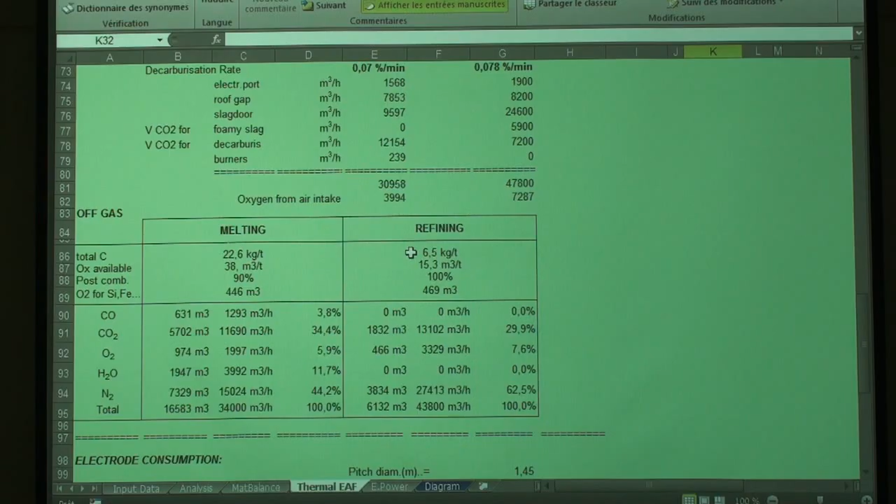You have this amount of carbon to remove and to burn, to oxidize. Yes. And you have 15 cubic meters of oxygen per ton. So you see that you can burn everything. In this case, the energy from post-combustion... So in fact here you have enough oxygen. Yes. This is the total oxygen, yeah?

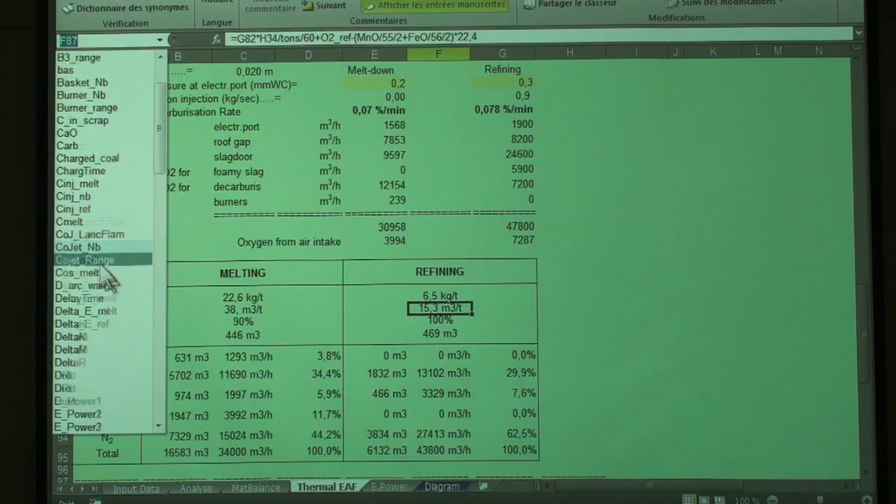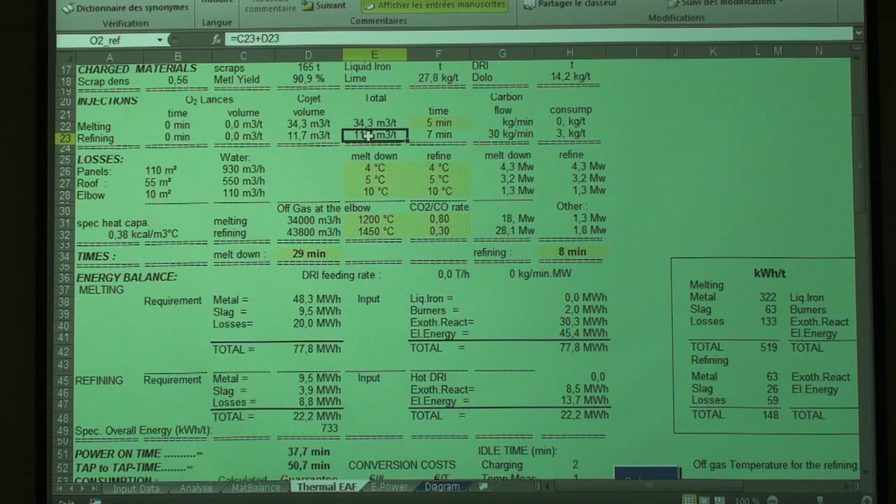G82. This one here. Alright. Yes, the oxygen from air. From the air. Plus the oxygen from refining. Yes. This one here. From the total oxygen injection: lances plus cojet.

Air plus cojet minus what is necessary for manganese and iron oxidizing, what is mentioned here. So this is the oxygen available for carbon oxidation. And you see that clearly you have enough oxygen available. For post-combustion you have even more, because of the remaining 7.6%.

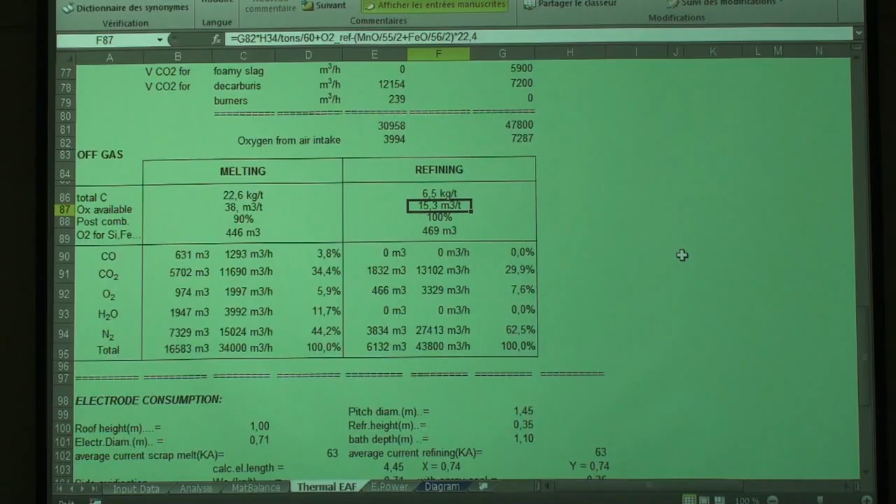That's why you can burn all the CO, which doesn't mean that the CO will be burned into CO2 in the bath. So, in the bath, for the thermal balance, we just consider 0.3. The rest of the post-combustion is done above the bath. Right? That's why the energy from post-combustion was taken into consideration, right?

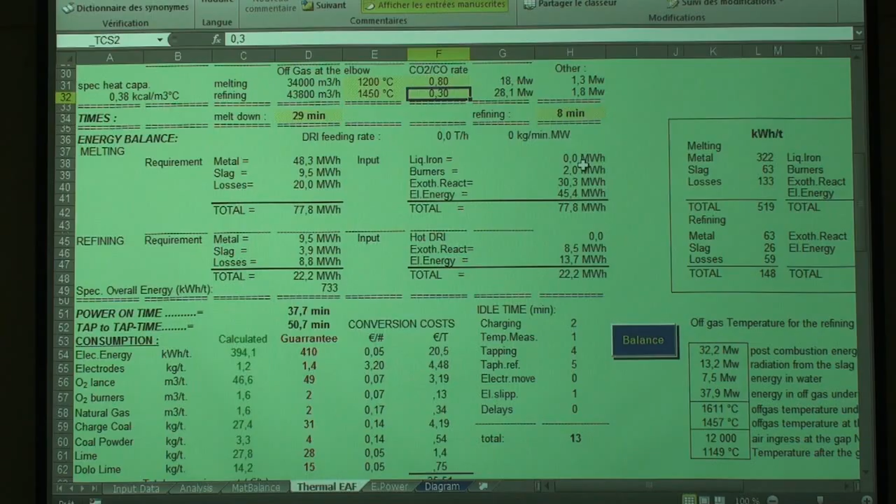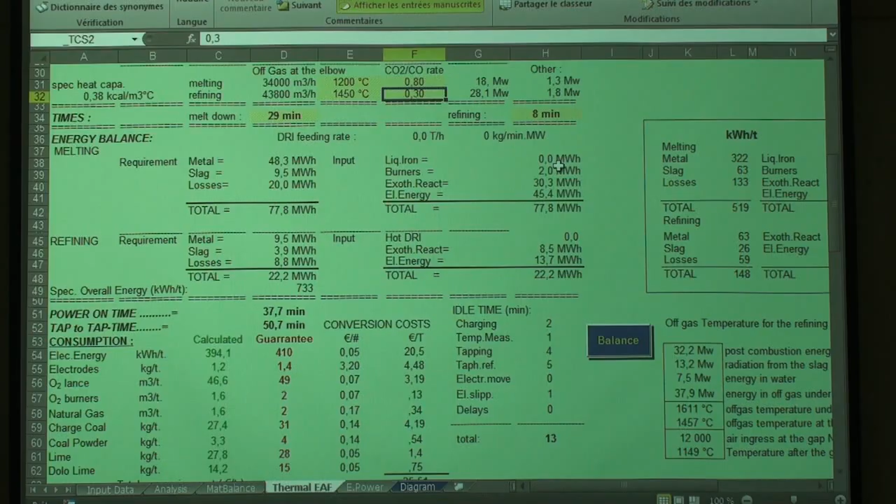And I have one more question regarding the silicon. How much silicon is there in scrap? I want to see that one once again. Silicon from the scrap. Here. 3.2 kilograms per ton. That also makes some energy, right? Okay. That's nice to hear. If you want to see the energetic equivalent, it's here. Yes.

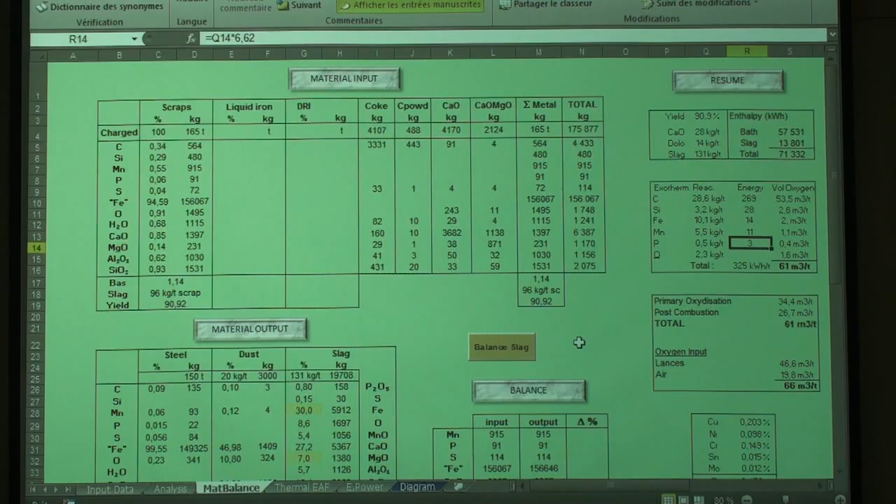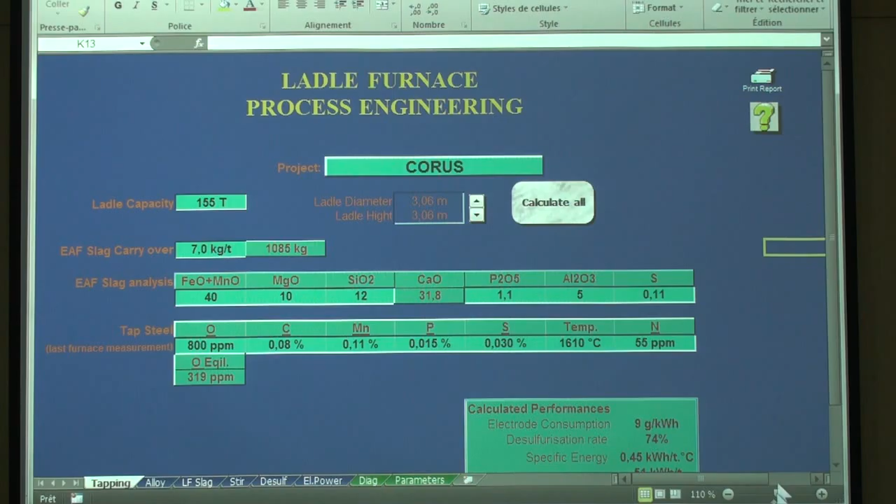Let's go into the ladle furnace. All right. So again, you see you have different tables. First, we start with the tapping conditions. And you see, if you put here the tap weight, 155 tons, the ladle dimension is adjusted.

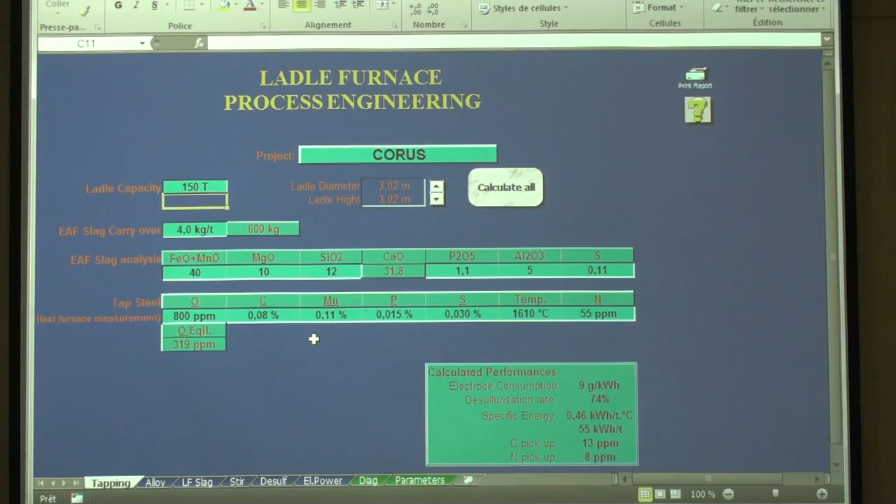The EAF carryover slag means the pour-out from the EAF, or do you charge another carryover slag? What's the exact meaning? This is the carryover slag from the furnace tapped into the ladle. Okay. From inside of the EAF. Yes. This is not the slag you get on top of the ladle after tapping, because you put lime in the ladle already during tapping. But this is calculated later. And this is the steel analysis. Okay.

Then we calculate the alloys, where you can put here the aim composition with the minimum and maximum. And you can calculate according to aim or according to minimum. So we can change the aim value and minimum value of the additives. This you can change. Yes.

If I remove this, you see you have a small advice that you have to calculate the alloys. Now, alloys are adjusted. If you calculate to minimum, you have another calculation. And you can put the cost here of the alloys and you get the overall cost. And this is what is optimized. Yes, the cost is optimized. So if you don't have cost, you cannot run this calculation.

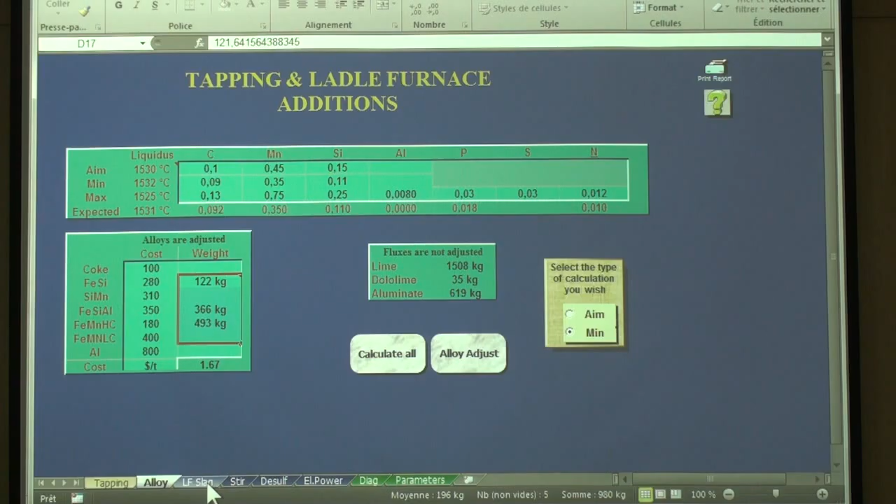And here you have the fluxes, and it tells you that the flux are not adjusted. What does that mean, flux are not adjusted? What is flux according to you? Lime, dolomite. Okay. And what means are not adjusted? It means you need to adjust it, these values are not correct. Like here, the alloys are adjusted. I see. So to adjust the flux, we have to go in this sheet.

So you combine slag analysis and deoxidization, because of course the deoxidization products will go to the ladle slag. So this is what oxygen we had in the steel. We have the ppm of oxygen from the steel, which are 120 kg of oxygen. And this is the oxygen fixed on FeO and MnO from the carryover. This is the total oxygen we have to remove in terms of kilograms. Then you have the deoxidization calculation with aluminum killed or with silicon killed. Silicon killed allows a certain amount of aluminum.

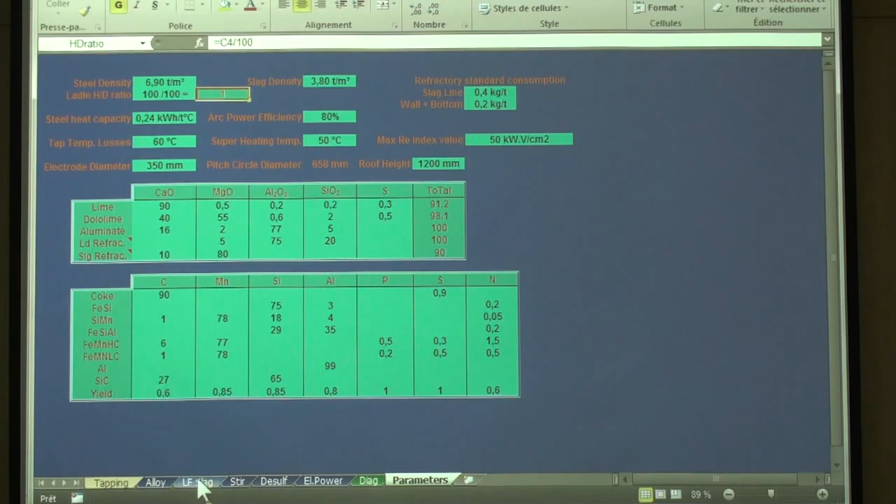So then I have the proposed composition for aluminum killed steel and silicon killed steel. This is standard analysis. You see that each time I have some Al2O3, even for silicon killed steel, because I don't consider the use of fluorspar. I know that in China fluorspar is allowed. They put a lot of fluorspar in the slag, and they don't have alumina at all. But in some other countries, like Germany, fluorspar is forbidden. France is close to be forbidden as well. So people are trying to use alternative solutions. So alumina is a good solution.

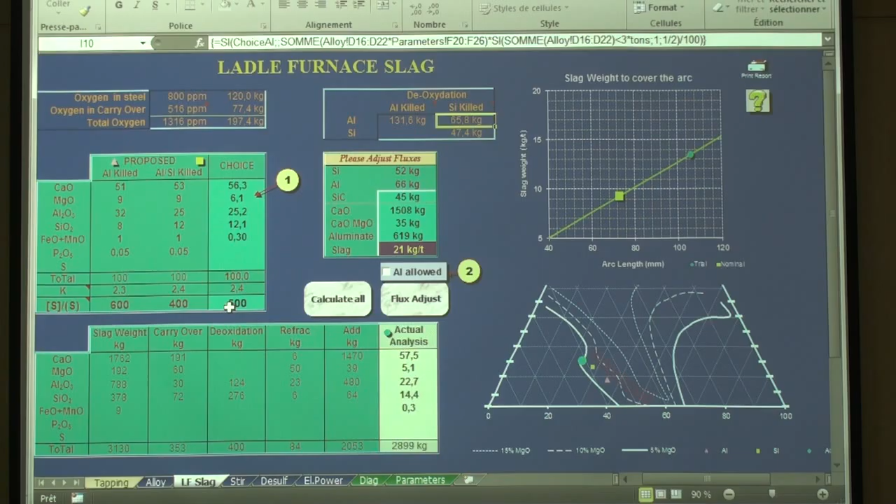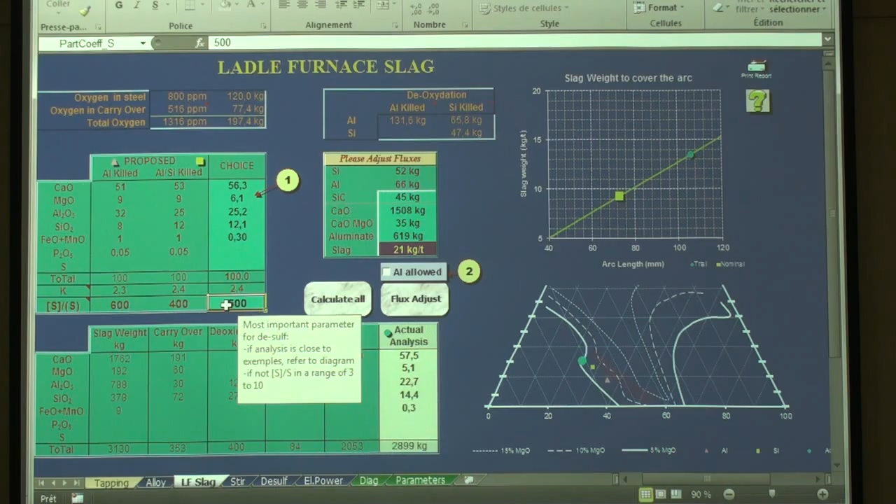So you put the analysis you wish here, and of course it's not possible to calculate easily the sulfur partition coefficient. So this is input. I haven't been smart enough to make a formula for the sulfur partition coefficient. If you have good metallurgists who have an idea, it will be welcome. So in order to have a guideline, here on this ternary diagram, you see the partition coefficient 500, here 200, and here 100.

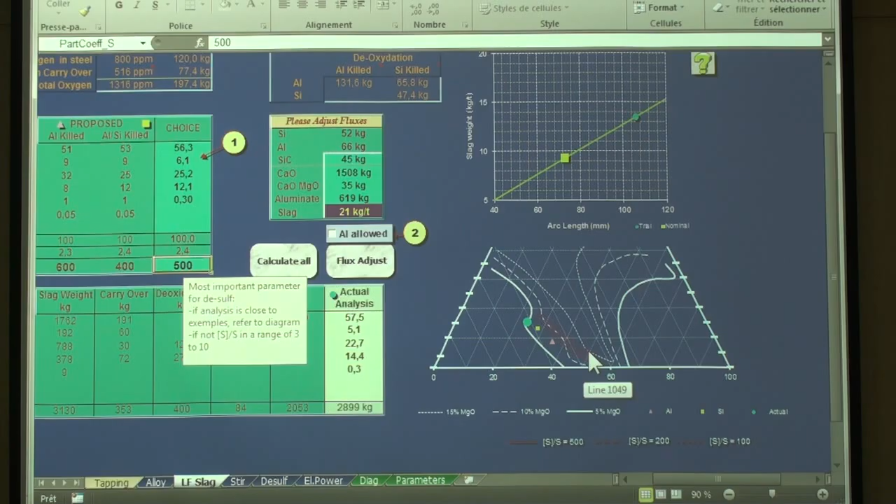So if I change, for example, I put here 25, of course I have to remove something, so the alumina will be penalized, so I will put 12 and MgO 7. It's a bit above 100, but the system will adjust it by itself. The K is the well-known basicity coefficient for the ladle. It's lime plus 2/3 of magnesia divided by the alumina plus silica plus half of the other stuff.

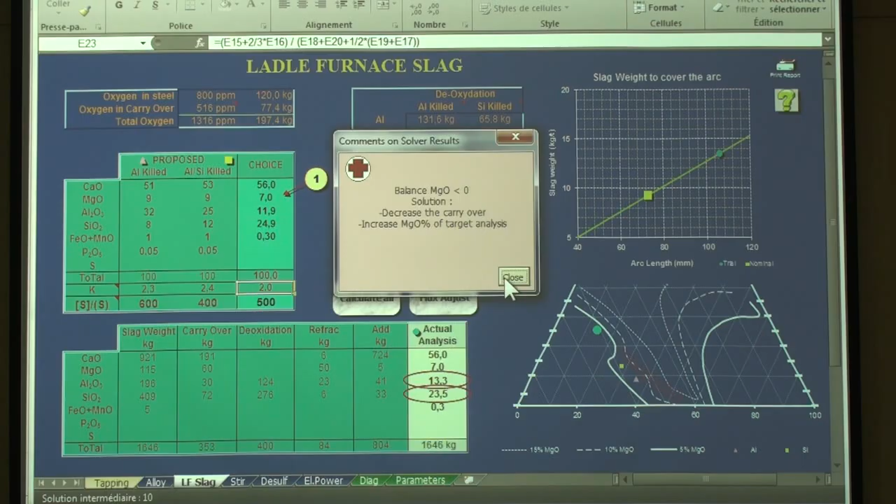So then we adjust. Okay, then we don't have the right stuff, so we have to start again. Balance of MgO is negative, so we have to decrease the carryover or increase the MgO of target analysis. So that means we have to put 8%.

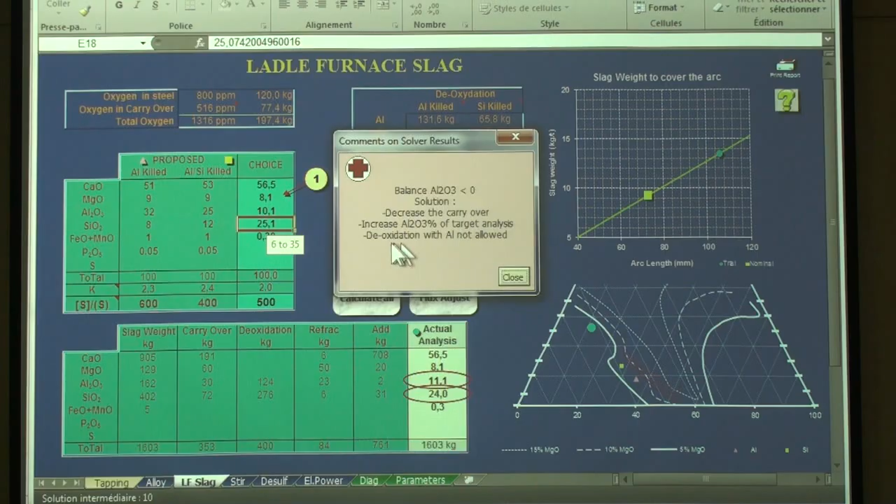Decrease the carryover, increase the Al2O3 of target analysis. Okay, so it's not enough. But now it's good. So now our point is right there. But we can as well decrease the lime and then the point will go on this side.

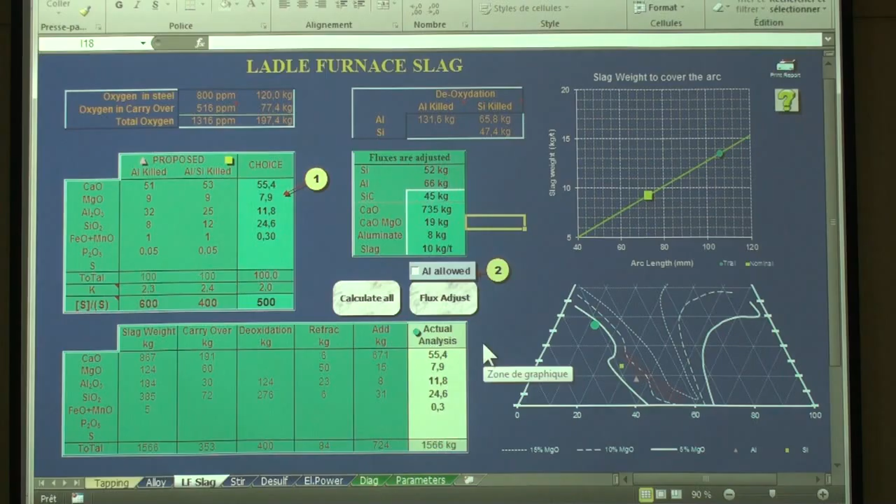This is not a dynamic model. This is just to, let's say, design the ladle furnace. To know roughly how much product you need to dimension the silos, and then the stirring, the flow rates.

So when we supply only the ladle furnace, in that case we have to receive the carryover slag compositions from the EAF or existing reactor. All the carryover slag. Okay.

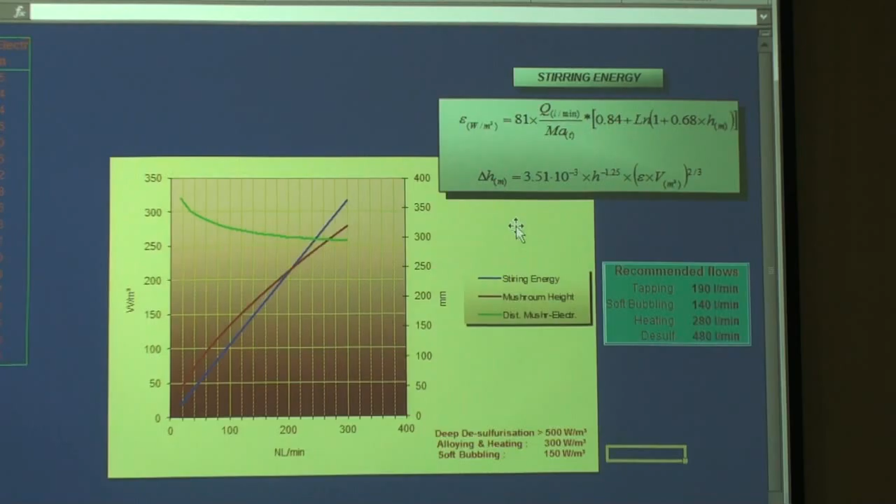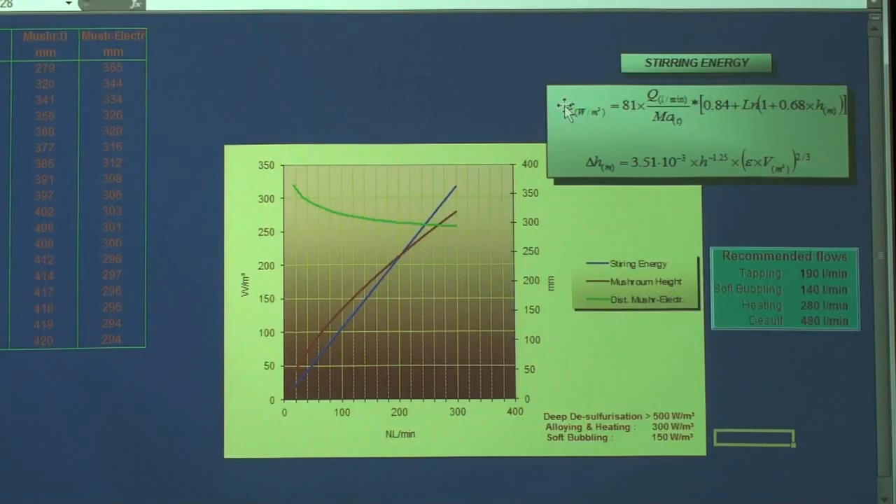So there you have nothing to do because it's already calculated with this criteria: for soft bubbling 150 watt per cubic meter, for alloying and heating 300, and for deep desulfurization over 500. So the flows are calculated here, depending on the ladle capacity and ladle height and diameter, according to this formula. I have not invented this formula, this is in literature. Right?

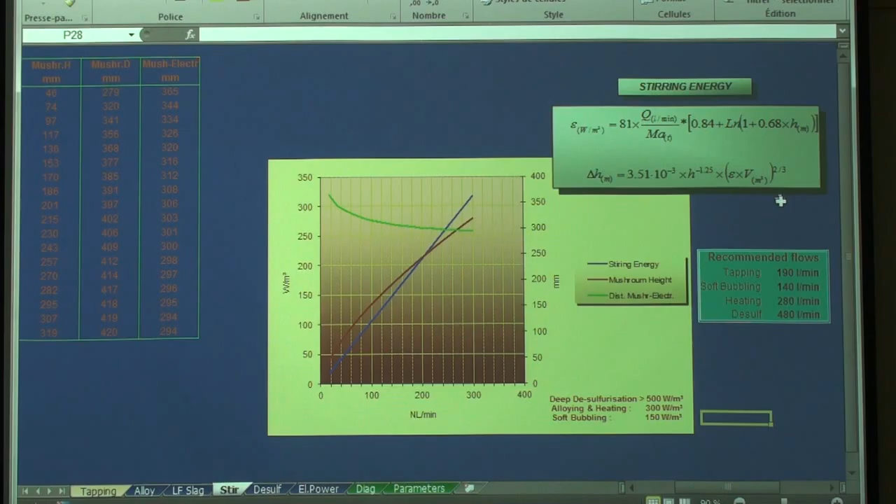And the watt per cubic meter are calculated according to this formula, where Q is the flow rate, MA is the ladle capacity in tons, and H is the height of liquid steel in the ladle. Underneath, this is the mushroom height. When you stir, you make a mushroom, and this is evaluating the height of the mushroom. Where H is the metal height, epsilon is the energy of stirring, and V is the volume.

So the blue line is the stirring energy, the red line is the mushroom height, and the green line is the distance between the mushroom and the electrode.

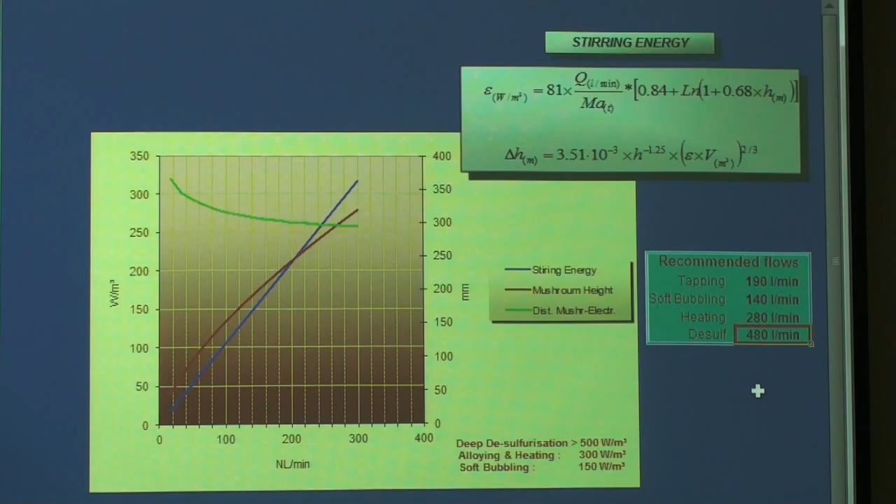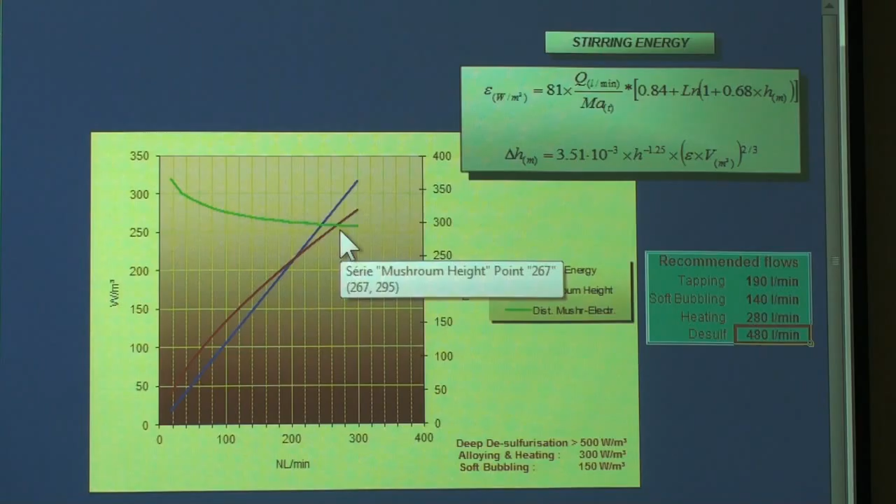This is just to cross-check in case of a small, sometimes you have a very small ladle. This is to cross-check that the electrode regulation will not be disturbed by the stirring. Because I had this case several times.

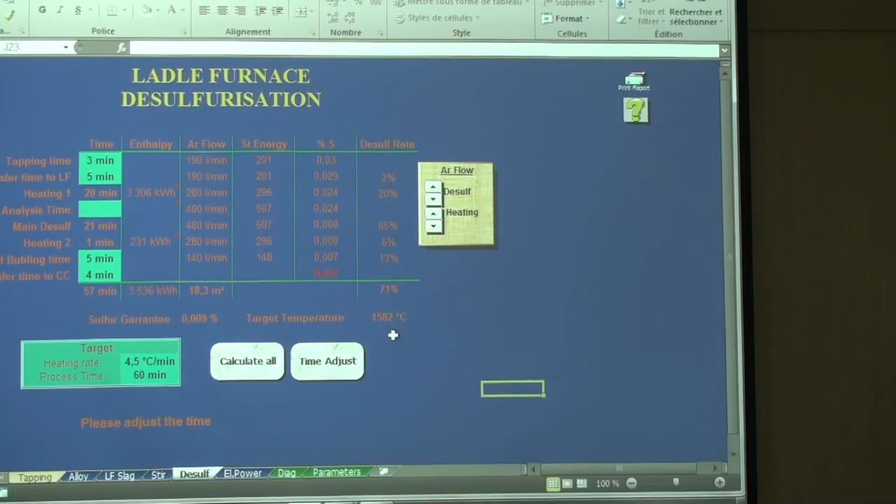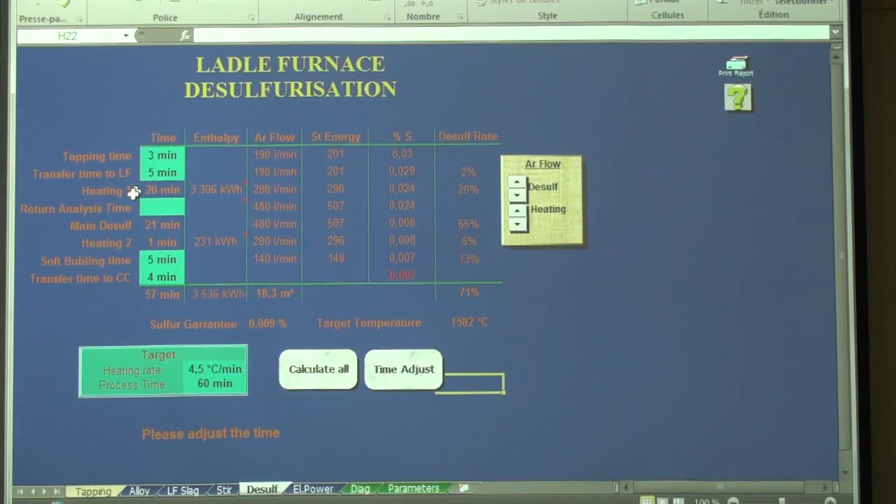Then we come to the desulfurization. Because for desulfurization rate and final sulfur, the time is very important. So we have to consider all the time where the steel is in the ladle. Tapping time, transfer to ladle furnace, first phase of heating, then some power off, for example, return of analysis, then main desulfurization. So it's combined here because I assume it's power off.

And this is the second heating, and then soft bubbling time for the inclusion decantation, and then the transfer to CCM.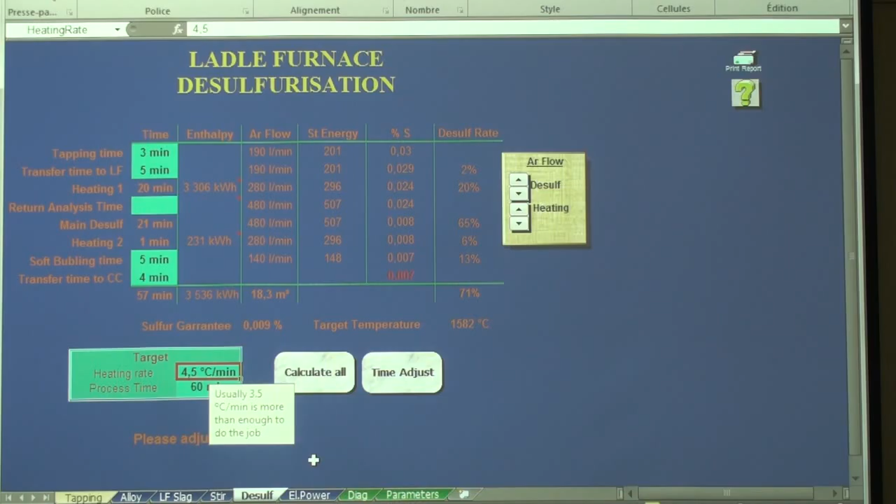So if we select the transformer capacity, same transformer for the 4 degrees per minute, can we use the 5 degrees per minute without any alloys, without any additives? No. This heating rate is all the time done without any alloying. This is without alloy? Of course. When you talk about heating rate, how can you check a heating rate whenever you allow yourself to put some stuff in the ladle? How much? Is it flux? Is it deoxidization? Is it manganese? Is it molybdenum? So whenever you talk about heating rate, it is all the time without any addition.

So when we check, we compensate the alloys, -1 degree and so on. No, forget it. In your case, the heating rate is only 4.5 per minute, without alloys. When you talk about heating rate, never allow the customer to put alloys. Otherwise, you have to fight for hours about what is the influence of the lime, is the steel already pre-deoxidized or not. It's simple: no alloys, 5 minutes heating time. I measure the temperature before, temperature after, and then I have the kilowatt hours.

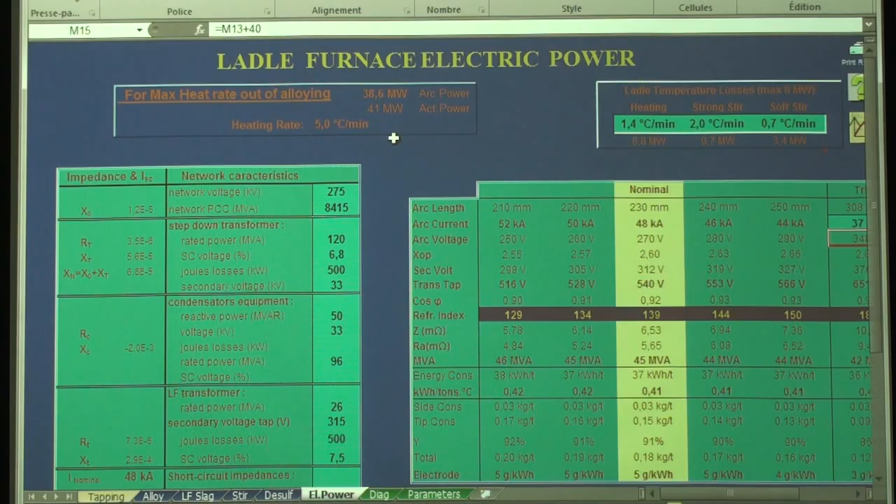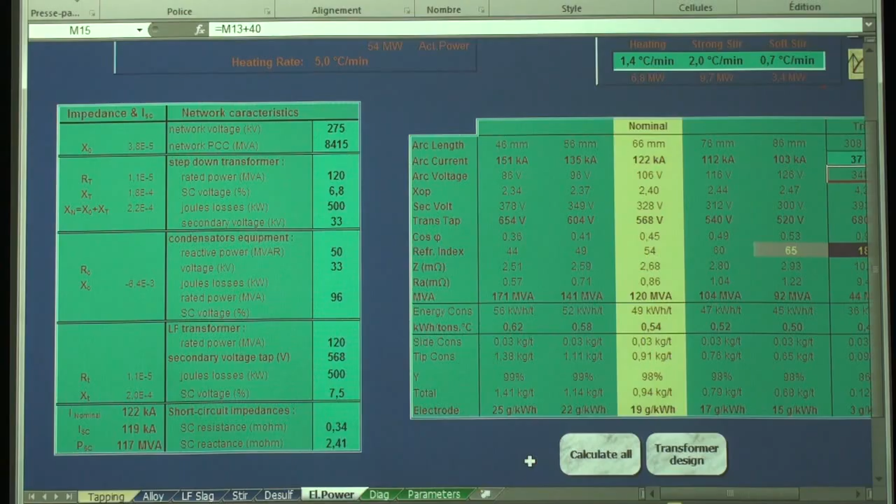So what is the transformer? You need an arc power of 38.6 megawatt. 54 megawatt? 120 MVA. Really? The existing is 45. 45 for 330 tons? You need 55 megawatt.

Ah, yeah. Okay, I see. Yeah, okay, wait. This 120 MVA, this is coming from here. Because the criteria I'm using is to keep the refractory index below 60. So you see different scenarios here. My favorite is, let's say, this is given by the slag thickness.

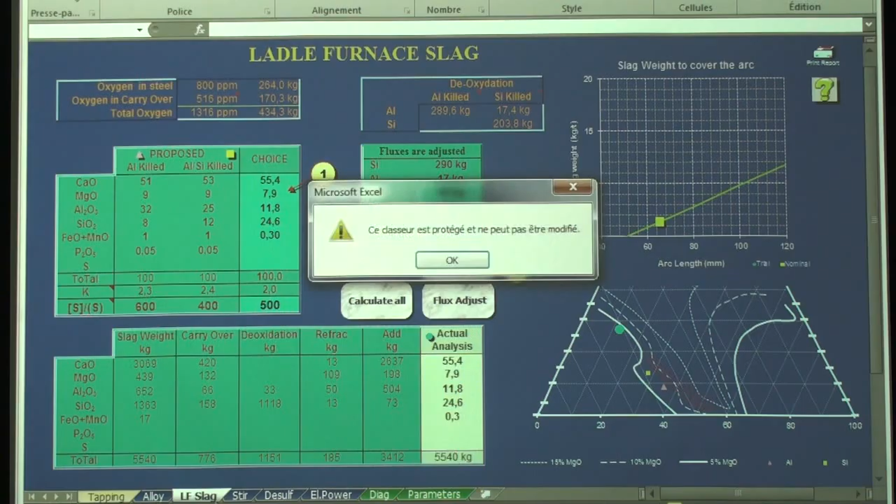Okay. Slag thickness, I have 17 kg per ton. So that gives me 66 millimeter according to the ladle dimension. Height, how about the height of the slag? 66 millimeter. 66 millimeter? Yeah. So to get 66 millimeter arc length, I need these settings. Okay?

But you have other possibilities, you see, because this is manual. Yeah? Then I have a huge step. Okay, I have only 44 MVA. Yeah? If I give 45 kiloamps, I get 46 MVA. If I go, I want to go.

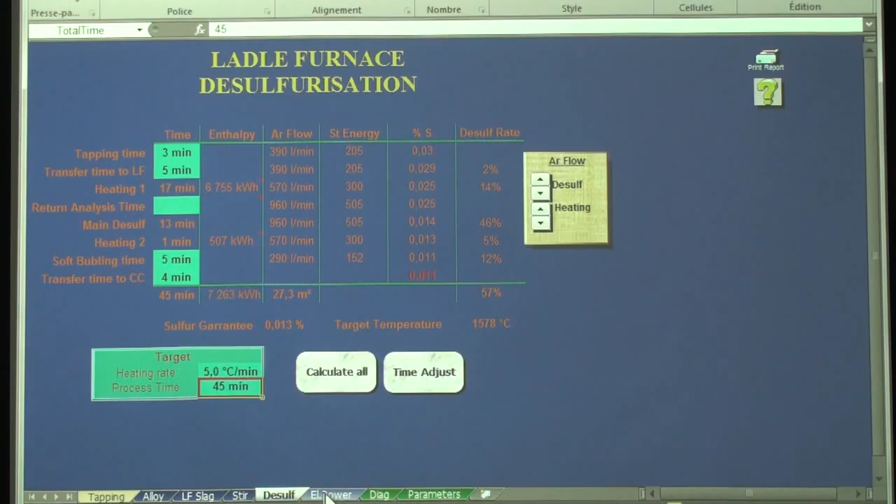Yeah. So you design it for 65, no, 60. Yeah, for 62 kA. All right. Now you want to have 5. So you will have to increase the transformer tap, yeah, to 500 volts. Of course, you will need 50 MVA plus 5% or 10%. Yeah? You design the current for the normal case, and you increase the number of taps.

Yeah, you increase the voltage in order to get the power you need for 5 degrees per minute. Yeah, but in this case, maybe I have to change the arc efficiency because it's going to be a long arc.

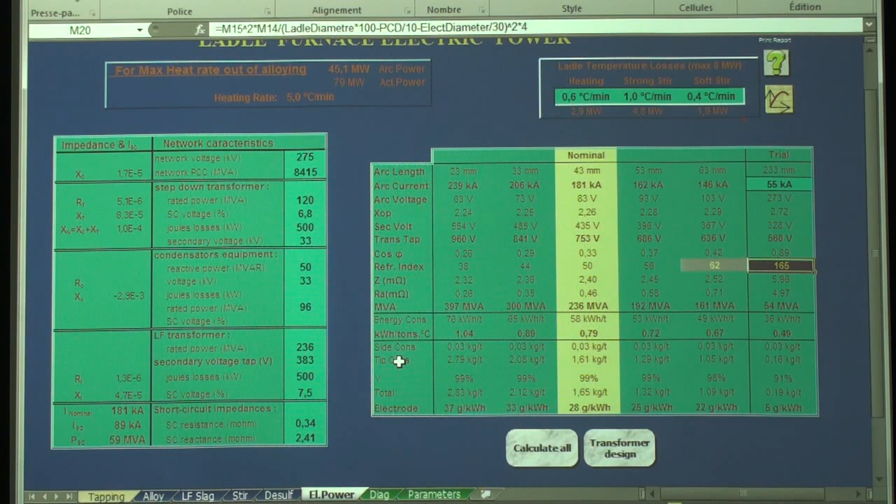So it's going to be 55 MVA. But still, you see, the radiation index is very high. Okay, maybe we will check again, yeah? And we will keep going with the procedure. Yeah, but it's a good exercise to show you how it works.

I think we would like to know how to change the index, yeah? How to change the index? Yeah. Just you change the current. The current only? Do you change several factors in the table? You changed several factors, refractory index and arc current and so on. You don't change anything, here you just change the current.

So, because the driving factor is the heating rate, what you want to achieve. So the heating rate is driving the arc power you need. Yeah. How about 4 degrees per minute? How much arc power do we need? 31.7 megawatt. In that case we can use 45.

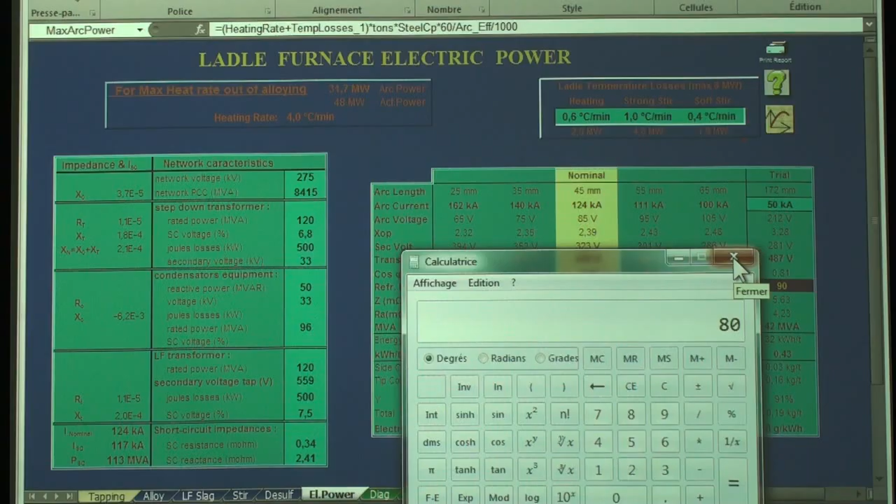But this is the way the model is calculating. This is the arc power you need to develop by the arc. So you take the heating rate plus the temperature losses. Temperature losses is considered as 0.6 degree per minute for this big ladle. Times the tons, times the steel heat capacity. The steel heat capacity is 0.24 kilowatt hours per ton per degree C.

Okay, sorry. How about changing the heating time? It's 10 minutes. Not 10 minutes. No, you fix the heating rate, and this is fixing the power you need. So the heating time has nothing to do with the transformer capacity.

If you heat during 10 minutes or 1 hour, it doesn't make any difference. I misunderstood.

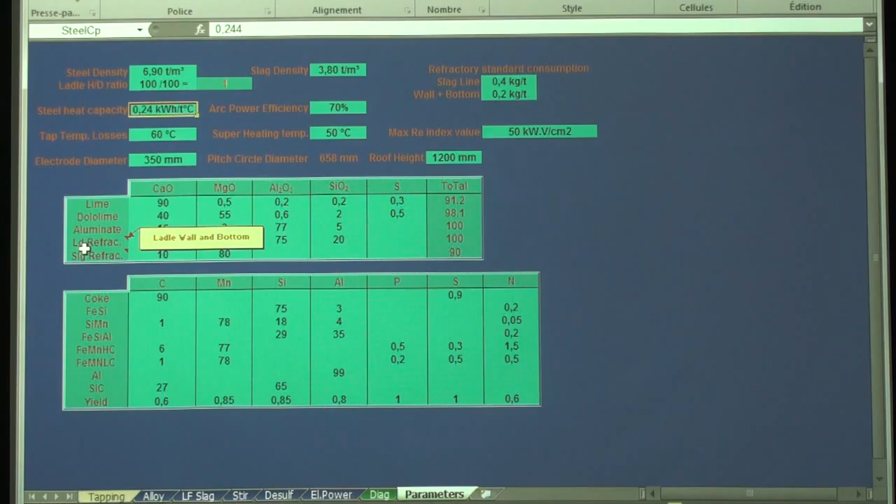Okay, shall I start again? I will check. No, but we are discussing about this model and the validity of this model. So I explain you how it does calculate. Again, I start 4 degrees per minute. Then you have the heating rate and the temperature losses. Yeah, the temperature losses are given here. Okay, so you have the degrees per minute and then converted into energy. So the kilowatt hour you need per minute. So then you have the kilowatt hour divided by the arc efficiency.

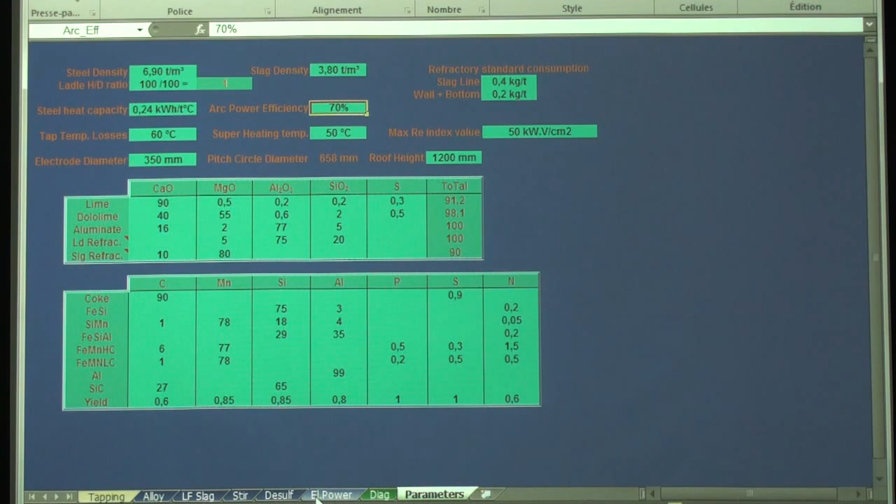Arc efficiency in this case is 70%, which is optimistic, and then divided by 1000 megawatts. So I have 32 megawatts necessary on the arc power. So this is the first thing you have to check with your calculation.

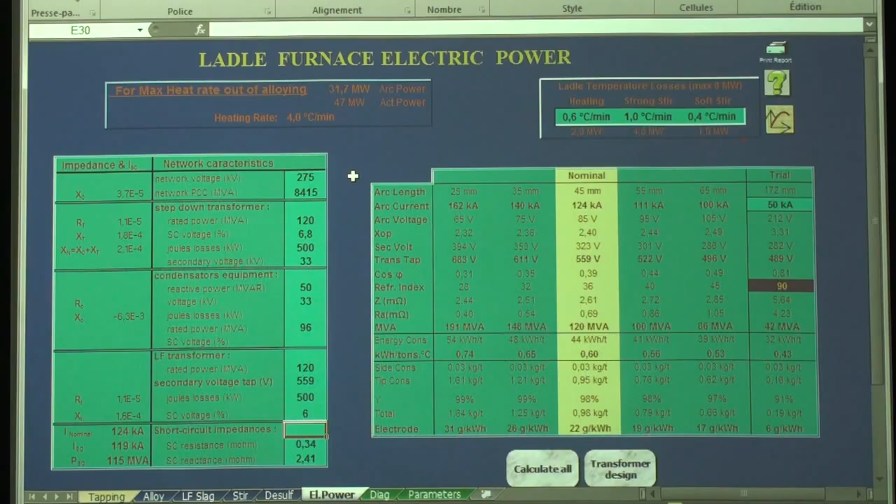I would like to know if it is right or not. But we used this calculation, this is simple, very simple. Yes. You can see, yeah? This one is 30 ton. You are calculating in kilocalorie per ton and degree C. My God. You can see the specific. So make it in kilowatt hours per ton. Make it in kilowatt hour per ton and degree C.

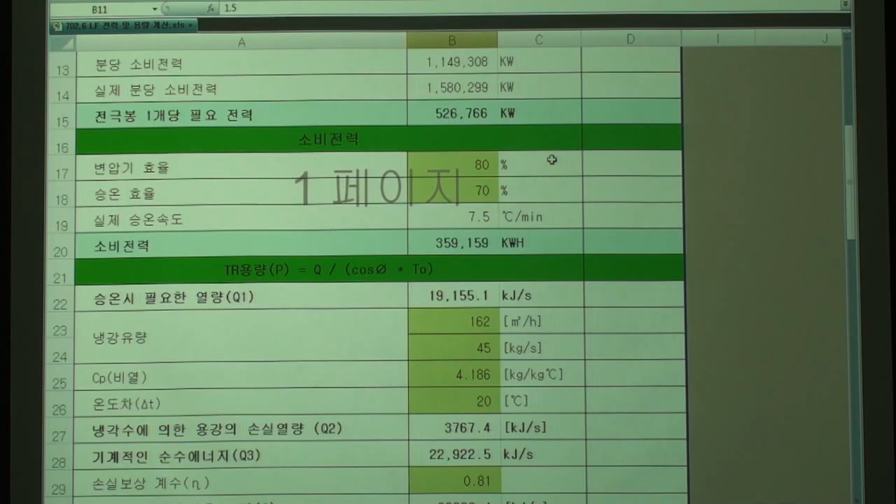22. Yeah, you are very optimistic. Although I have 0.6 degree per minute temperature drop and you have 1.4. So you have 1.4 temperature drop, I have 0.6, 1.5 even. And I can find only 31.7 and you have 22. How can that be? I mean, I'm sure that your steel heat capacity is very low.

What is the arc efficiency?

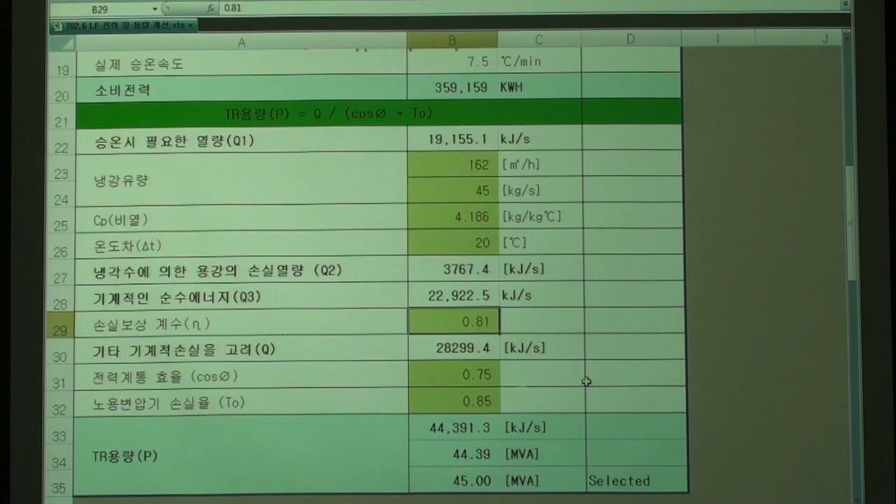Okay, forget. Never mind. No, but you have proposed already this transformer. This is the existing data. We already used it. From 22 MVA, it's 100 ton. 18 MVA, 20 MVA. I remember. You have cross-checked your calculation with the result what they have?

Yeah, but at that time I'm not in charge of the furnace. To calibrate your model. And we checked it with the furnace supplier, and then we used this simple calculation only to calculate the transformer capacity for our purchase. I'm using this model since about 15 years. Yeah, I think so.

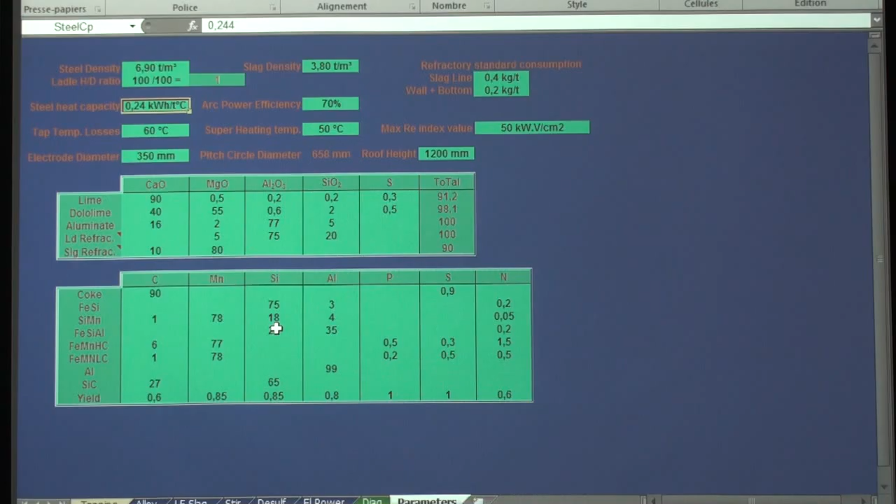Okay, I need a time break, 5 minutes, because someone's come. Okay, no problem. You need a time break.

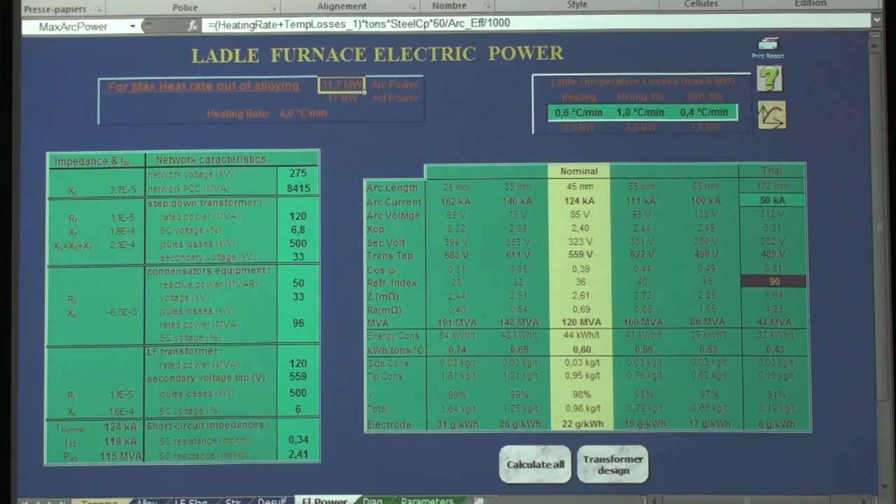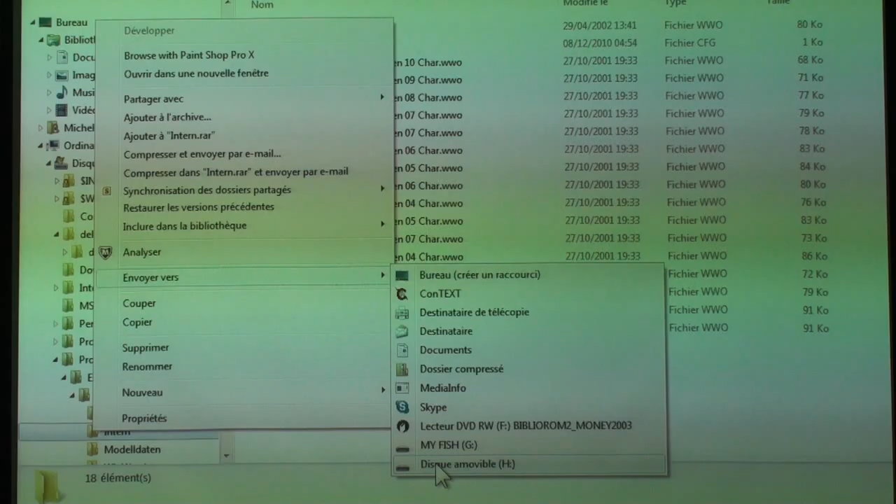I found it, the history CFG file in your C directory. Yes, history file. It is needed. Here, this is it. This you need. Okay, give me that. It's a copy again. The history folder has the same address, is needed. So I send everything. Okay, thank you very much.